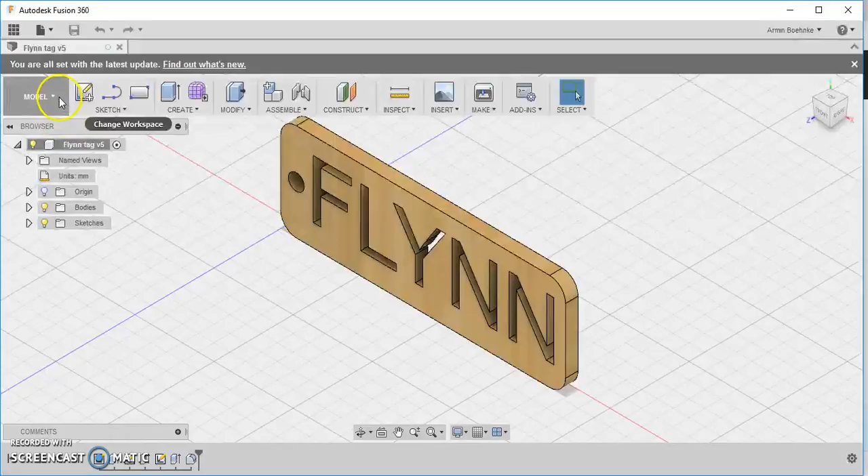All right, let's look at how we do a working drawing. Head up to Model, then Drawing, then From Design. I'll slow it down so you can follow the steps. Be patient, Fusion is slow, just relax.

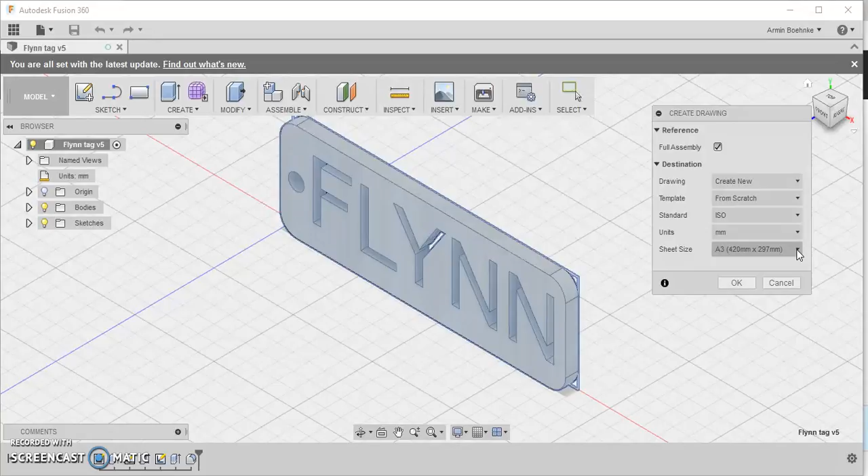We're creating a new drawing from scratch using ISO standards. Everything's in millimeters. For the senior folios, pick A3, but for the junior 7 and 8 folios, pick A4. This one is going to be A4.

Press OK. Patiently wait. You might want to tell a joke if you know a good one. I'm not much of a joke teller, so I'll just wait patiently. Maybe you've asked the person next to you for a little joke. You're still waiting patiently. Wait for the stop thing to turn, just patience, patience.

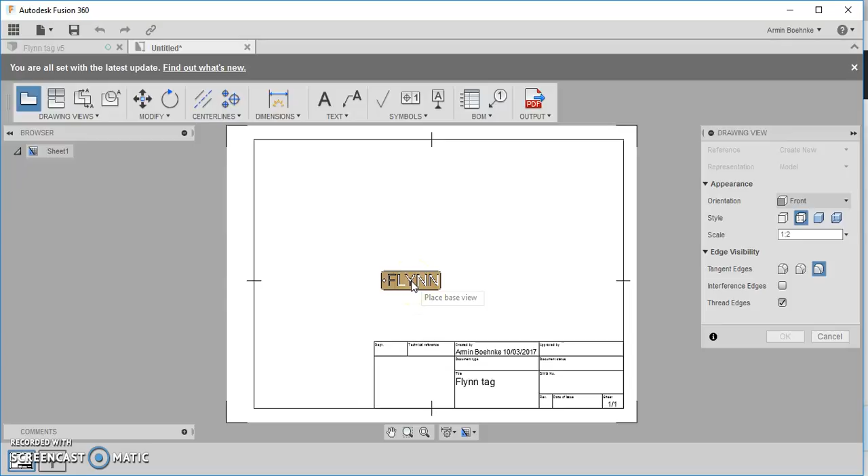Okay, now we're good. What you're seeing is an A4 sheet of paper. So what you want to do is get rid of the massive text block that's in there. Instead of placing your base view, just press Escape, click on your text box and press Delete. Now you've got your full A4 sheet of paper.

You need to go back to your base view. Every drawing starts with a base view, and remember to follow the exact layout of an orthogonal drawing. Make sure that everything's in the right spot. So we're going to base view.

Now you've got a few options along the side. Probably for this one, the main one is to get the scale right. If you look at that, we could definitely make it bigger, right? So instead of 1:2 or half the size, let's try 1:1. I reckon that's good, so if you press there, that'll place your base view.

You want to check and see that your front is correct, and then what style you want. Do you want just visible edges? Do you want to have hidden edges as well? Shaded or shaded with hidden? Let's just go visible edges, please. Oh nah, let's go that one. Press OK.

Okay, let's get the rest of our base views before we add in any text or anything. I should say projected view. We've got our base view. Now we want to project our top view and side view from that main base view. Pick projected view, select parent view - that's the main view you're working from. I want to work from that view, and you can see straight away I get my top view.

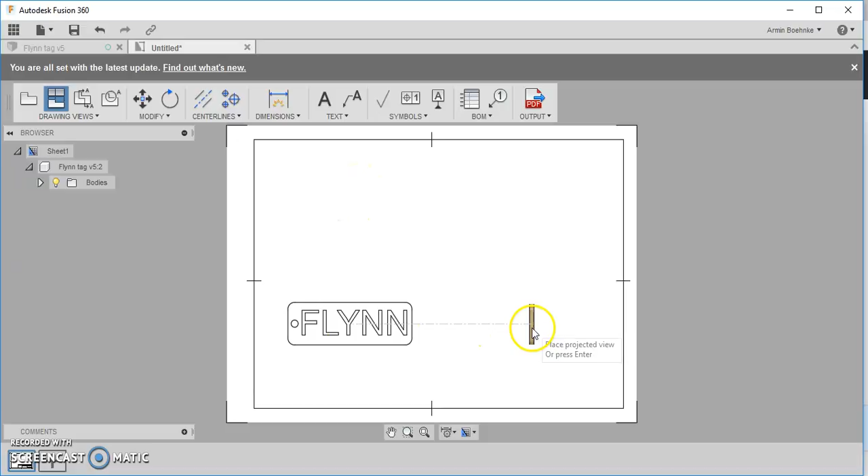If I go down and across, I get my side view. Where you place it is up to you, just think about your page layout. You've got there, coming across, and there.

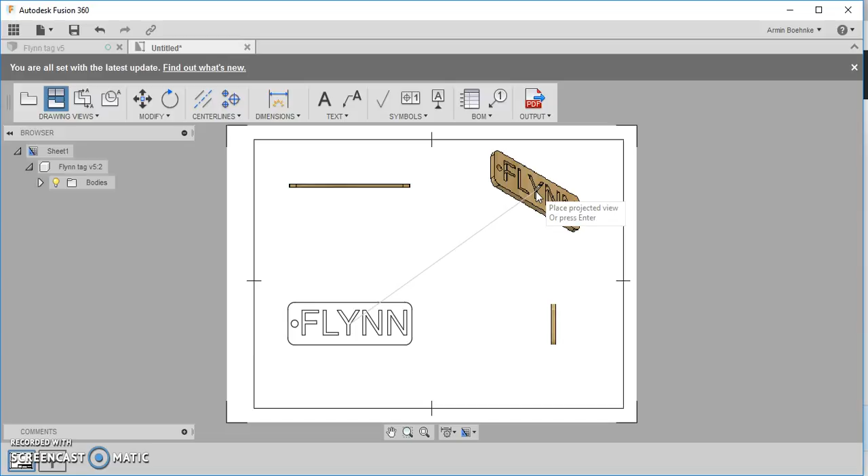You can see it also does give you your isometric view. It probably doesn't look the exact way I want it, so I'm going to save that last view, and I'll show you how to do that next.

At this point, you can just press Enter, and that places your views. One thing I want you to notice is when I looked at the view before and went, do I want visible edges? Do I want hidden edges? All those lines there, those little dashes, they're the non-visible edges of my lettering. Depending on which one of those views you created or selected, depends whether it's got all those little lines in there.

Okay, now let's look at placing this last isometric view. It's going to be a new base view. That way you've got control over size, whether it's shaded, which isometric angle you want for it.

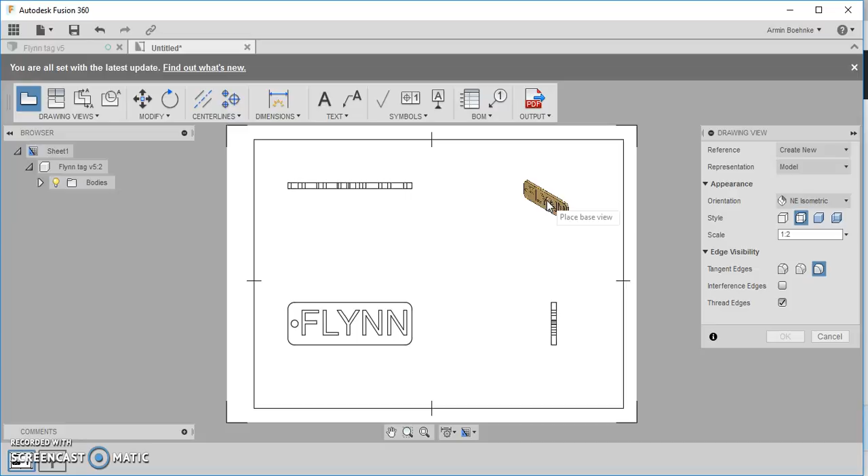Your orientation, northeast, in there, right? Try to make your isometric view as big as you can within the space you've got, just so that you can see a really nice isometric shaded view.

So I'm going to try to make it 1:1. Could I make it even bigger? 1.5:1 - that might just be the max that we go. Okay, so if I click it, it places it.

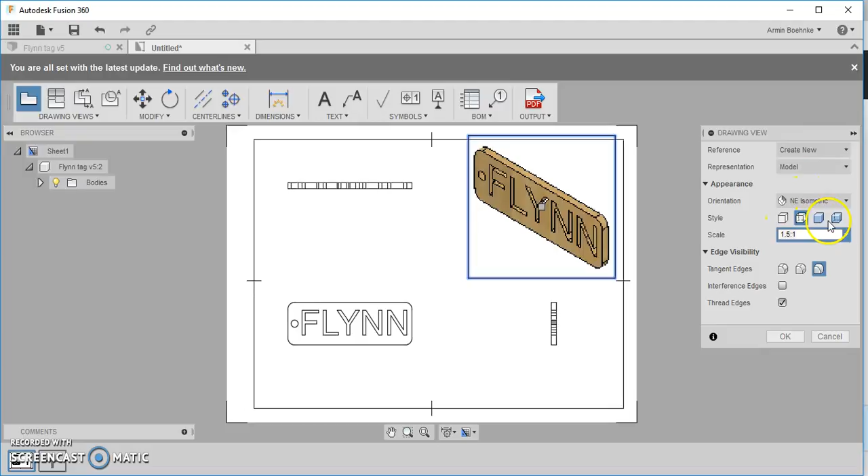The next thing I want to look at is what sort of shading do I want, visible, invisible. I'll just go fully shaded. It hasn't really previewed it yet, so let's see what it's like. Press OK. Beautiful, you've got all your 4 views.

Next thing I want you to do is look at the text that's in there. Let's do the bottom title block first.

Specify my first corner just there, and my title block is going to come across like that. Start with your name, then come across your year level and the subject, then a bit further, the name of the project.

So we're going to call this Flynn tag, and then the date it was created. Today's date for history is March 10th, 2017. You can change the height and boldness depending on the style. Generally, orthogonal drawings are very basic, and it's about having technical information from it.

So I'm just going to press close. New text. And front view.

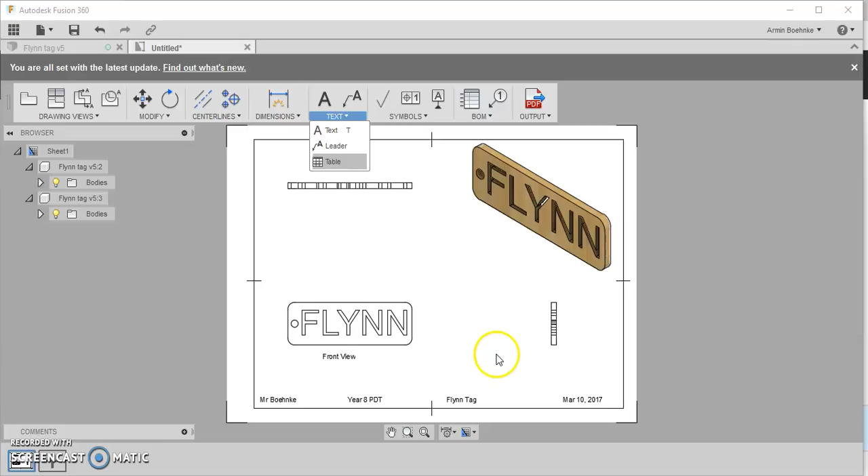Now look for the shortcut. So next to text, there's a T, so that can give you the shortcut. If you just press T, it gives you the shortcut for it, and you can pop it in there. That's your side view.

Oh, something happened. And that's your top view.

Now you can always move the views if they're not in the right spot. Try to keep them so that they line up, that view with that view, and on the same plane. So we just bring that, and we might bring it over to there.

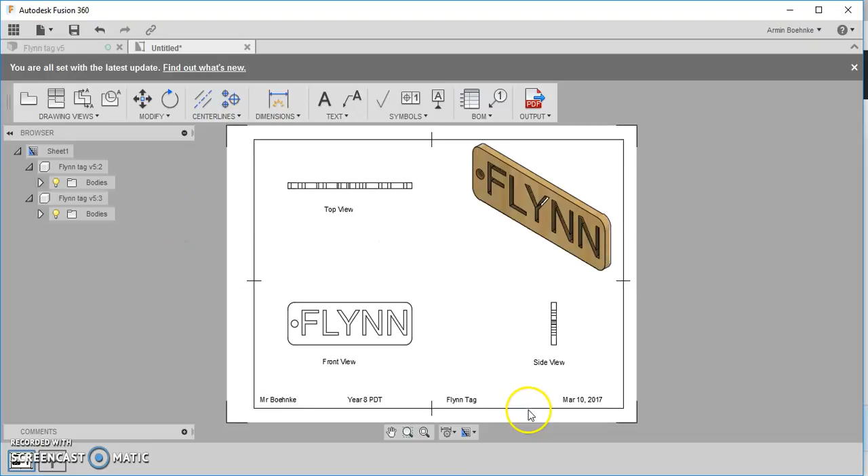Okay, that will give you all your views labeled. The next thing you want to look at are your dimensions. Now it's not about dimensioning everything, it's about dimensioning the key bits and making sure you've got enough detail.

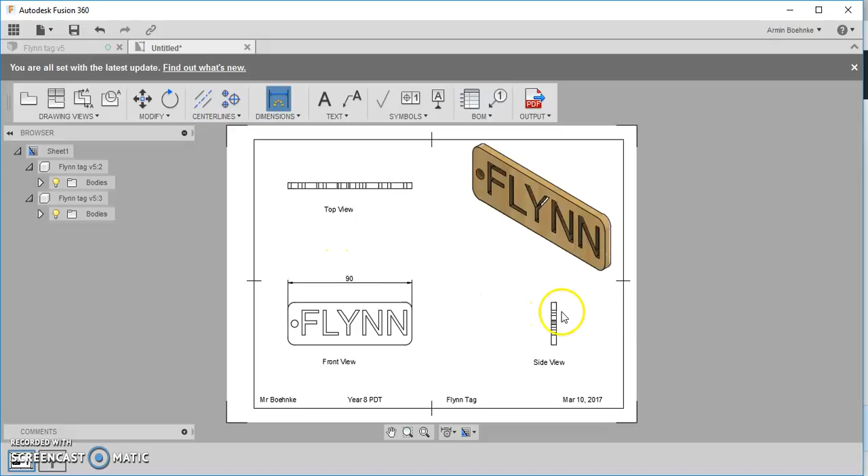So I want to know how long that is, I want to know how high it is, I want to know how thick that is. Now some of the other things, you might want to add a note about what sort of font you used. You can put in a height for the font as well, if you like.

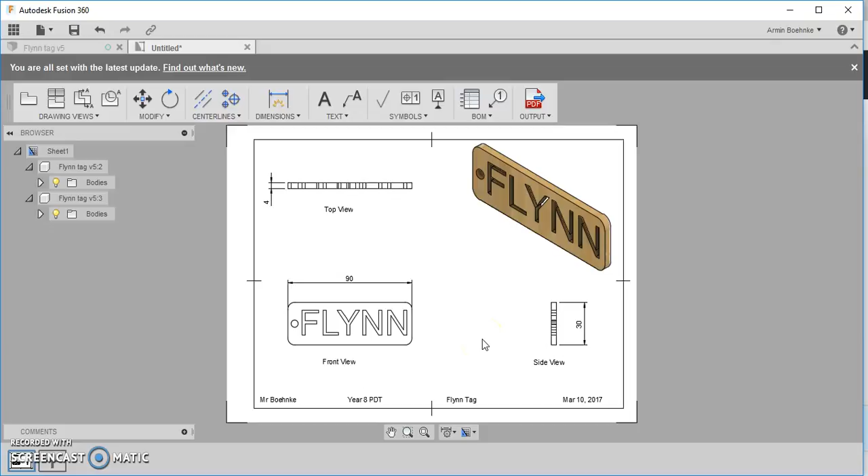It gets a bit tricky. You saw that one went off on the angle, so if you press escape, it'll undo that. If you want to zoom in so that you can get those dots better, then go back to your dimension. Again, you want to try using D for a shortcut.

Let's try from that point to that point, and we'll bring it out to that side. You can then zoom out.

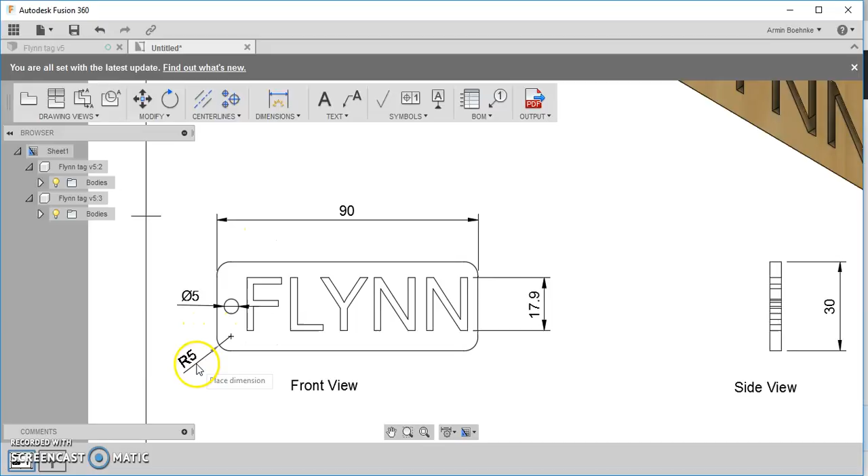Some other things you might want to do on this particular one: diameter of that hole, got that there, and the radius of my round that I've got there. Zooming out, have a look. If you press the roll bar, you can pan.

From there, other things you might want to do is just maybe put a note in about what style font you used. So that can just be here, and just find a nice empty space for it.

It's saying select edge, so maybe press escape, and then let's go back into text. That's better.

Note: font is Calibri, and you can even say, you know, size 10 or whatever it is. Probably in this case it would be a bit bigger, so size 25. In here, your notes, you just want to make them nice and small, so let's try 2.

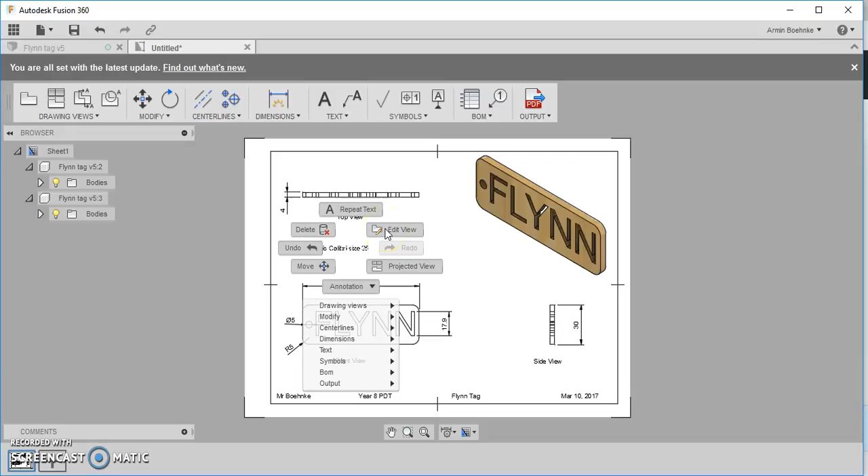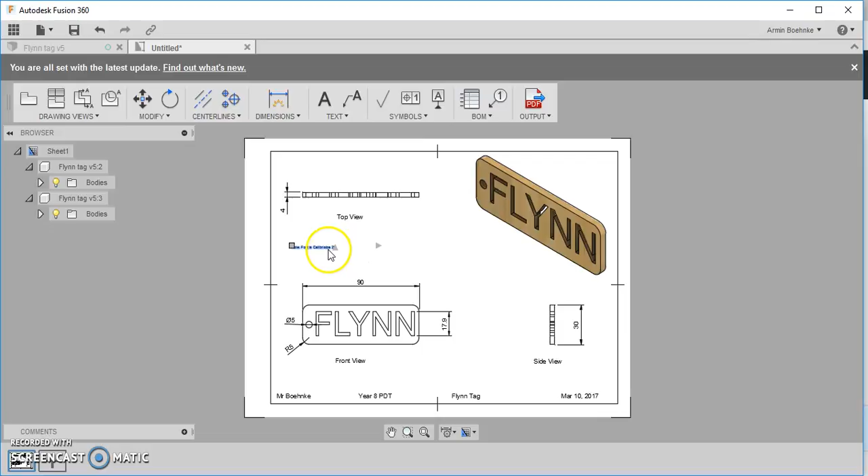If you need to edit it, right click, edit view, select view - maybe that didn't work, press escape and double click in it. Okay, highlight it now, go to 2 mil. Close. Depending on whether you think it's big enough, you might want to go back in and just go, okay, well, let's turn that to 2.5.

Remember, this is a technical drawing, so it's not really trying to add in lots of style, lots of fancy stuff. It's actually about getting the information across. Okay, that note is about the front view, so I reckon put it next to the front view.

From that point, you might look at, well, what other measurements are we missing? If you've got all your measurements, think about, are they nice and easy to read? Off to the side, can you still see the actual drawing really well? I think we're done.

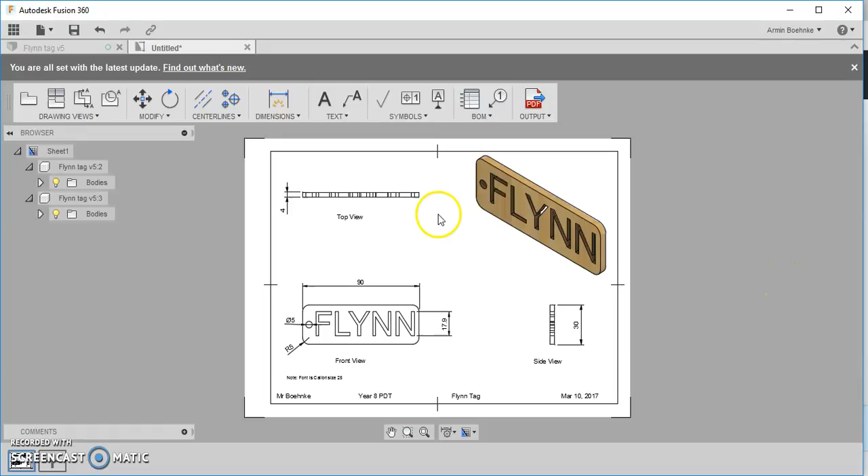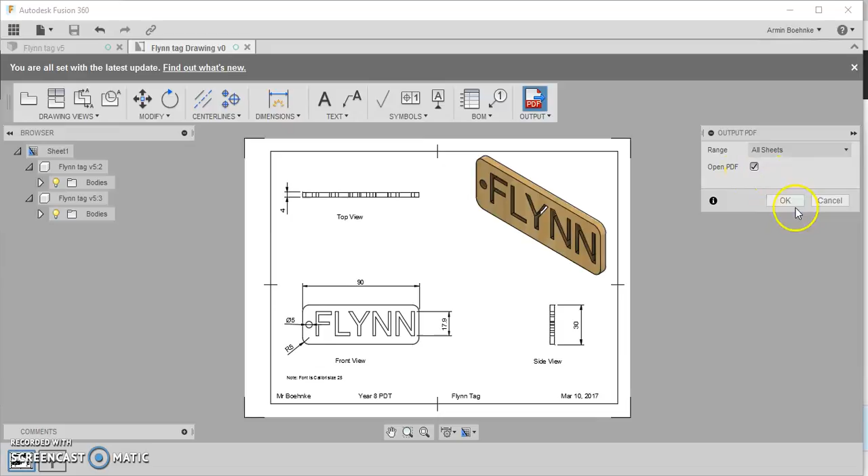And then the last thing you want to do is output to PDF. All sheets. We're going to open it to see how beautiful it looks. And let's do that. Flynn tag, pop it on the desktop. Beautiful. Now you can easily print that out.

Standard sheet is your A4. You can enlarge it to A3, whatever you like. You can upload that PDF onto the internet under the do work. At this stage, it's finished and complete.